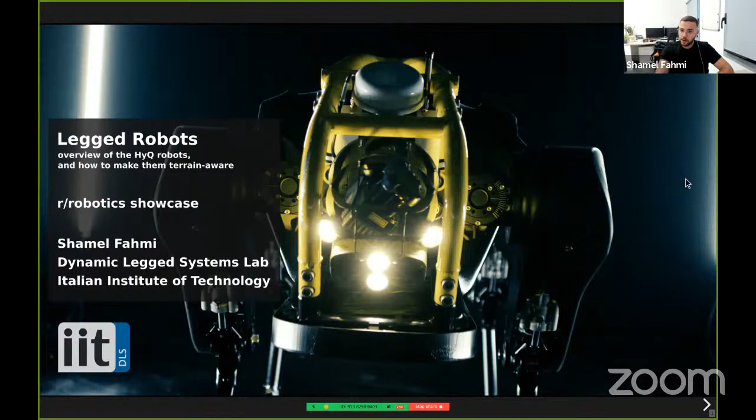Maybe if you can click on this link, it's going to give you the same rendering of the presentation slides that I'm having right now. In case you have some problems with videos, just check it out—it's going to give you a better rendering for the videos.

So yeah, the Dynamic Legged Systems Lab, or DLS Lab for short, is part of IIT, the Italian Institute of Technology, in Genoa, Italy. The Dynamic Legged Systems Lab has been around for 14 years, focusing on legged systems. That mainly started with the PhD of Claudio Semini, who's the head of the lab. We're broadly interested in making robots walk, but that also requires working on robot design, control, locomotion, and perception.

The main focus is also to make robots walk during heavy duty operations. The way we envision this is that we want robots to aid human beings in several applications—construction sites, planetary exploration, warehouses, package delivery, and agriculture, but also search and rescue missions where you don't want to put humans. Think of what happened in Chernobyl or Fukushima, or even in Notre Dame in Paris.

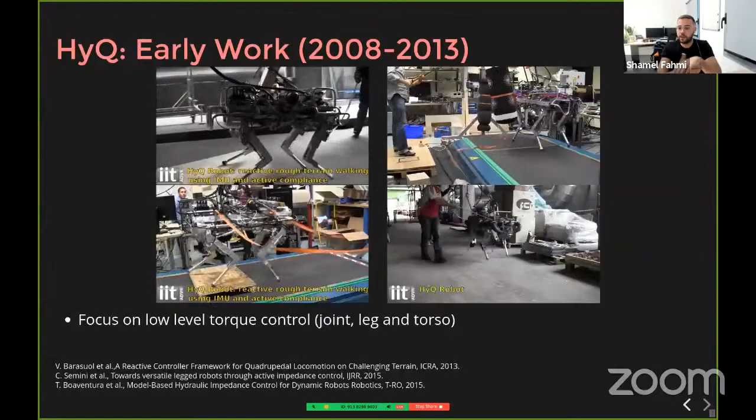So mainly also controlling the joints, legs, and torso. In here, you can see different applications. For example, on the top right, you can see some strategies, or a recovery strategy, on how to let legged robots try to recover from any push.

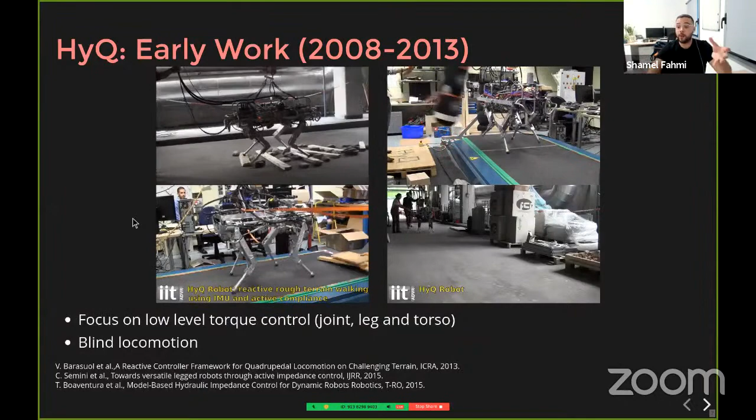But also you can see here pretty cool locomotion capabilities trying to traverse through different rough terrain. What's important to show here is that at this time, all of these locomotion capabilities you're seeing are blind locomotion. So the robot doesn't see what's around it, it has no terrain awareness for it.

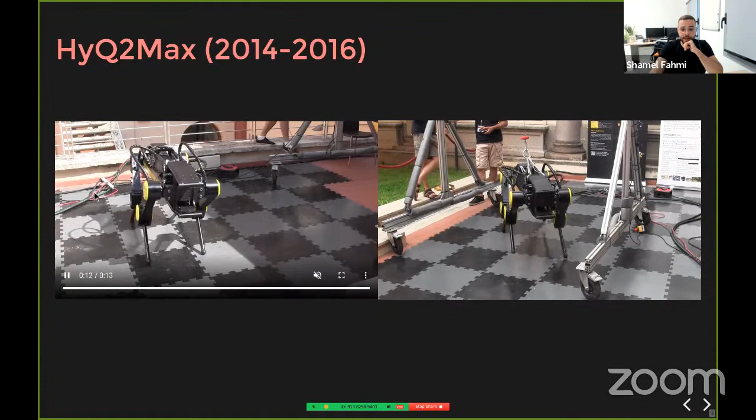After that, we were thinking about what HyQ2Max lacks. The first thing we thought of is power autonomy, because as you can see here, the robot still has the hydraulic pump unit - the pump is outside, not on board of the robot. You can see here also that we're connecting the power supply, which is not on board.

So what we really wanted to focus on was power autonomy, and because of that we decided to have the hydraulic pump unit, or HPU for short, on board along with the power supply. We also wanted to improve the robustness and reliability of the actuators, so we teamed up with Moog, who custom designed these hydraulic actuators for us using 3D titanium printed technology. That was the third generation, our flagship robots.

As I mentioned, we want to focus on robots for heavy duty operations, and because of this we were wondering what might happen if we let these robots pull something as massive as an airplane. So we took HyQReal to the airport of Genoa, and with the help of Piaggio Aerospace, we borrowed their Avanti airplane, which weighs more than 3 tons. We decided to do some experiments to see if the robot is capable of pulling that plane.

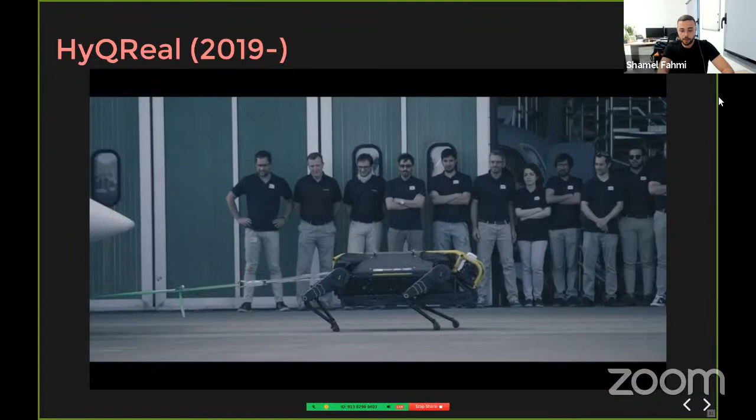This is part of the video that was from 2019. It went viral, showing HyQReal being able to successfully pull that airplane. That day was a great day for me personally, because I've never seen something like that happen, and it was truly inspiring to see a real robot pulling it like that.

But of course, before pulling the plane, we had many experiments. This, for example, is showing you the first steps we had for HyQReal. This was the first time we would try everything and see what the robot would do.

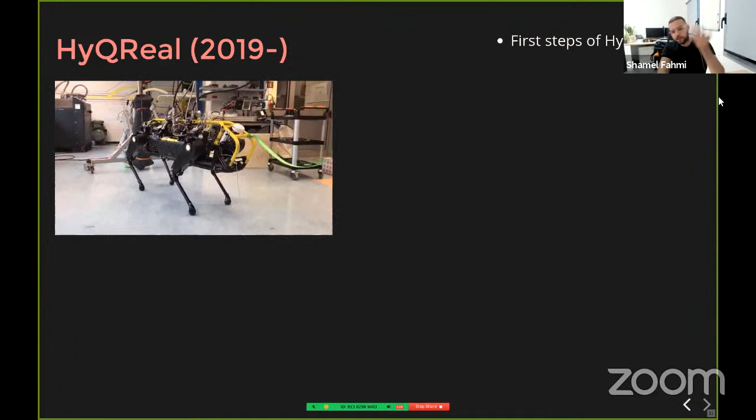Since we were pulling a plane, we decided, okay, let's try to compete first against ourselves. So here you can see Michele Focchi, one of the postdocs, the researchers at the lab, trying to push against HyQ. And when that was successful, we went over with that.

So we wanted to pull a car this time. We took Victor Barasuol, who's also a researcher at the lab. He took his car. I was the one actually inside that car, and I was pulling the handbrake halfway through.

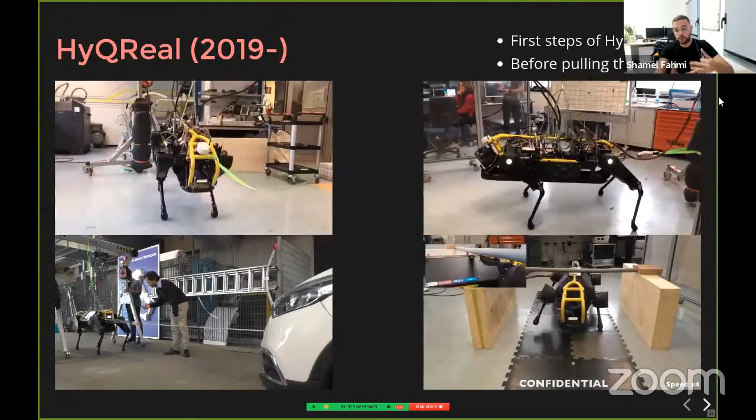Going back to the workspace, now HyQ, HyQReal and HyQ2Max also have a larger workspace that allows us not just to do this kind of stuff and different locomotion, but also allows the robot to traverse confined spaces, which is really important for the applications we're thinking of.

Now this part is one of the projects we're working on recently. The first version, or first part of it, got concluded in 2021. It's about Tele Manipulation with HyQReal.

So we teamed up, a couple of labs of IIT teamed up with INAIL. INAIL is the National Institute for Insurance Against Accidents at Work here in Italy. What they want is to separate humans from hazardous situations. So we were trying to find ways to move workers from these situations into a safe environment and let robots work in these dangerous situations.

And that made us think of teleoperation and teleoperating the robot. So the main purpose of the project was to teleoperate the robot. You would have an exoskeleton, a hand exoskeleton, with a virtual reality interface that we refer to as a pilot station.

And the pilot station is then going to be teleoperating the robot that has an arm on top that can do different kinds of loco-manipulation.

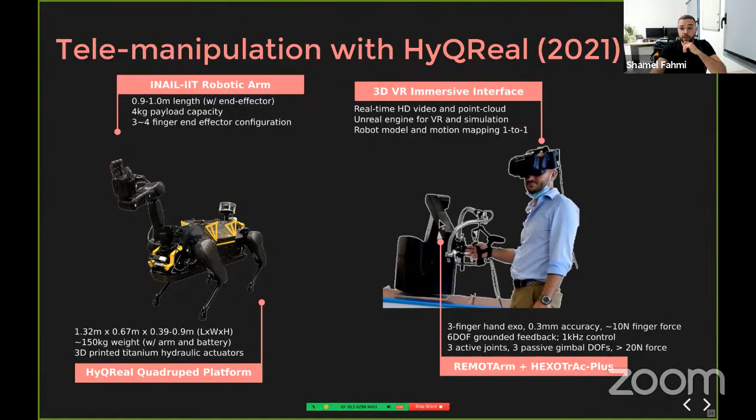This is a quick overview of the Tele Manipulation system we have. On the left here you can see the field robot, which is HyQReal integrated with a custom designed arm for such applications. On the right here you can see the pilot station, which has the hand exoskeletons with an arm and the virtual reality interface.

Let me give you a little information about the arm. As I mentioned, it's custom designed here at IIT to fit the project requirements. It has 5 DOFs and weighs 5 kilograms excluding the end effector. It can also carry up to 4 kilograms.

The control uses torque control or impedance control. Here we optimized the space to do different things, for example configurations for picking up or normal operation, but also to have it in a stow position so it can distribute its weight on the robot.

And the hand we're using here is called the HERI hand, which is a 4-fingered hand that has integrated pressure sensing and visual feedback.

This is just a video to show you what the hand can do, what the exoskeleton can do. Here you can see it doing some manipulation, picking up objects transparently. So you have the hand being like the robot, a KUKA robot, picking things up in a teleoperative way.

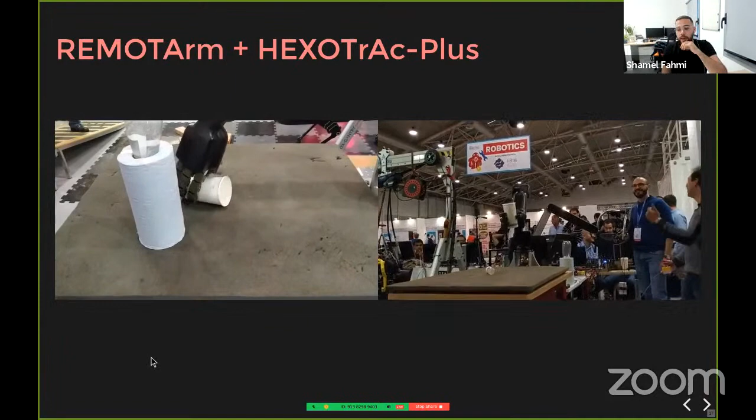And here we have the arm with the hand and the teleoperative exoskeleton. This was at Maker Faire, before COVID, I can't remember exactly when this was. But here you can see, for example, how to pick up a tennis ball on top of a bottle. And here we were showing Enrico Mingo trying to catch that ball.

And this is the integration of everything. So what we want to show here is the robot being teleoperated. For example, here we wanted to break the window and take the hose.

So here you can see, for example, what the pilot is actually seeing. It's only seeing these 2 cameras from the VR.

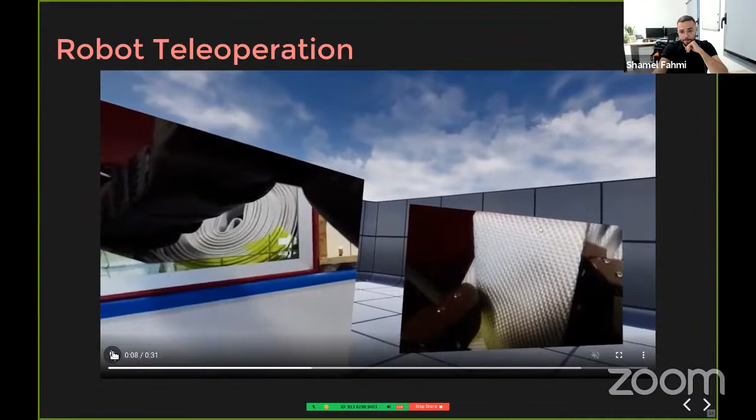Here we're showing another example when we wanted the robot to just open a door. And again, in the bottom videos, this is what you can only see within the pilot station.

Here we're showing some other things, for example showing the robot picking up some objects and putting it back for inspection.

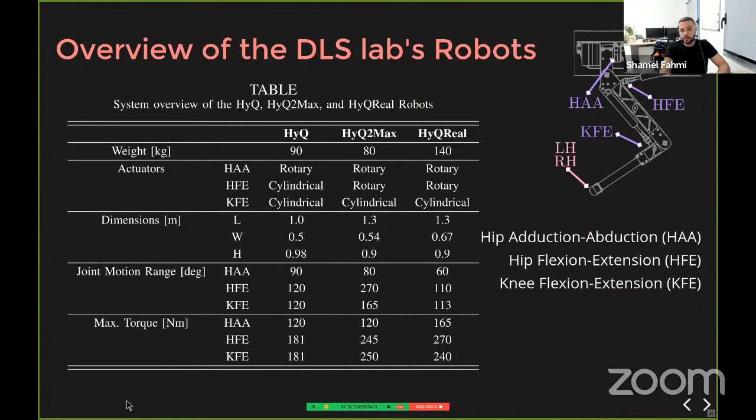So that concludes a brief overview of the HyQ robots, or the robots that we have here. I'm not going to go through this table, but it's cool for you to go back and check it out later in the offline version to see the comparison of the different platforms.

Here they're without the arms, so they're the actual robots. This takes us to the second part of today's talk, which is about terrain awareness. This is the same video I showed you in the beginning when talking about HyQ in 2013. This video also went viral alongside other quadruped robots, like Big Dog from Boston Dynamics, which was also doing some pretty cool locomotion at that time.

As I mentioned, this was blind locomotion, but ever since then the goal was to move legged robots away from research labs into the real world. So if we go back to these applications and think about bringing legged robots to the real world, we should wonder if there's anything in common across all of them.

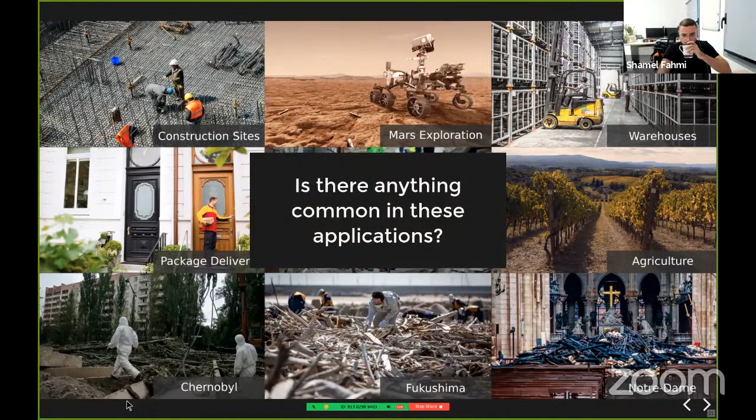To me, the first obvious thing in common is that the terrains the robot traverses are never the same. The terrain could be dynamic, meaning it can move and isn't stationary—it constantly changes. It's also unexplored, like if the robot hasn't traversed this place before or you don't have any prior map. But the terrain itself could also be uncertain.

What I mean is that the robot can be in situations where it doesn't get certain information from the terrain, like scenarios where vision is denied or the robot's perception is noisy. The take-home message is that the terrain itself introduces a large amount of uncertainty, and the way to deal with this is to make legged robots terrain aware. So the solution is for legged robots to be terrain aware.

If you're not familiar with the term, terrain aware locomotion means the robot is able to make decisions based on the surrounding terrain using its perception. Abstractly speaking, the main idea is that you want the robot to perceive its surroundings, and then using that perception, start to reason about and understand the information, and take decisions based on that.

I want to categorize terrain aware locomotion into two categories. The first is called proprioceptive terrain aware locomotion, or PTAL for short, and the second is exteroceptive TAL, or ETAL. PTAL strategies rely on internal robot measurements to acquire terrain information, while ETAL strategies rely on directly acquiring terrain information, mainly using the robot's vision.

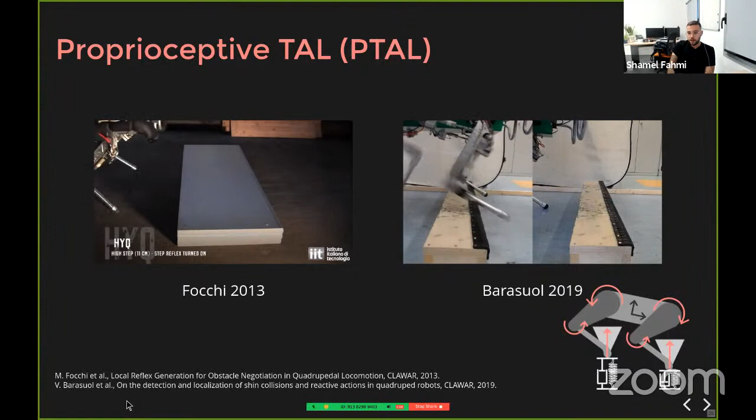On the right here, you can see work done in 2019 by Barasuol et al., which does something similar—detecting whether there's an obstacle or not. But beyond that, the key here is also to localize where on the leg the robot collided with an obstacle, so that later it can adapt its trajectory based on that.

Now that we've talked about PTAL strategies and ETAL strategies, when would you use each one? PTAL strategies are important when visual feedback is denied, like in areas that are smoky or have thick vegetation, for example.

But also if the terrain map itself is unreliable, you might want to use PTAL strategies. However, PTAL strategies, based on their nature, are limited to corrective actions. What I mean is that if you took a look at the reflex strategies I was talking about, the robot first had to collide to detect that it's in contact.

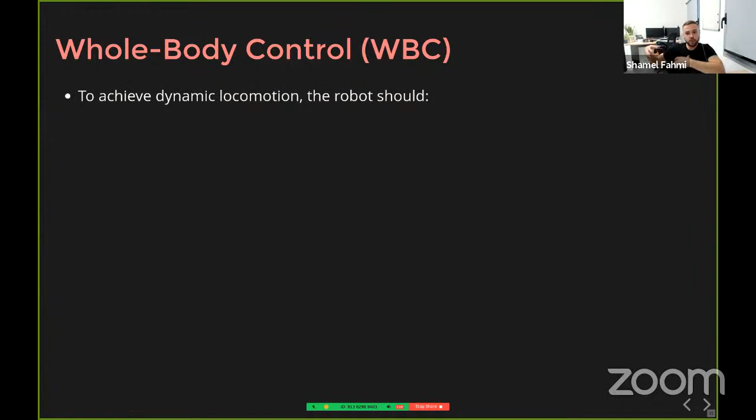So about whole body control. Now, if you want to achieve dynamic locomotion, or if you want to have breakthroughs in legged robots, the robot should be able to track the trajectories that you give it. That's obvious, but it should also try to maintain balance, so as not to fall down. It should also be able to reason about its own dynamics and its own limitations.

But also, if you want it to be terrain aware, the robot should not just reason about itself, but it should reason about the contact or about the terrain, for example the terrain's inclination or physical properties. So if you want to deal with all these objectives in an optimal way, the solution is to devise a whole body control framework.

So let me tell you a bit about the whole body control framework that we're using here at the lab. The whole body control framework starts with the locomotion planner, and the idea of the locomotion planner is that it spits out trajectories for the legs and for the base.

Then we have a state estimator module that feeds back the states or estimates of the robot. And then, using the planner and the state estimator, the whole body control is going to realize the trajectories from the planner, taking into account the limitations that I just explained. Then it's going to spit out optimal torques that are sent at the low level to the low level controller that sends the torques to the robot.

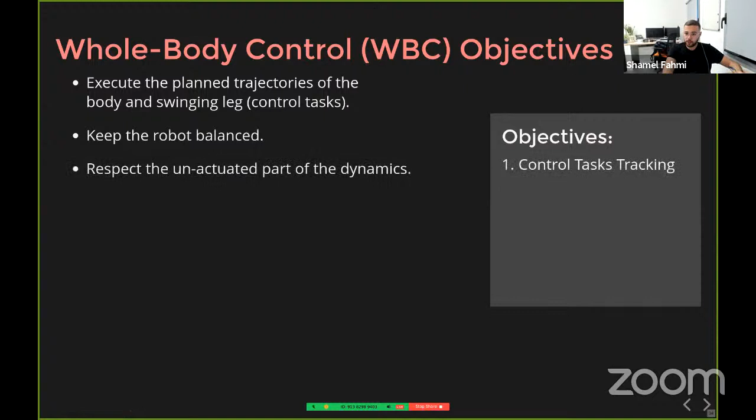Let me briefly tell you about the objectives of the whole body controller. As I just mentioned, we want to execute the planned trajectories from the planner, but also we want to keep the robot balanced. We also want to respect the unactuated part of the dynamics, as well as the actuated part and the joint limits. We want to respect the contact constraints that I mentioned, so we want to be aware of the terrain.

The first thing we want to do is enforce or encode friction constraints, which basically enforces the robot not to slip. We also want, for example, since you're walking on the ground, the ground is never going to pull towards it — it can only push, not pull.

And then we also want to maintain contact consistency. What I mean by maintaining contact consistency is that, for example, if you are on rigid terrain and the robot is standing still, you want to enforce that the stance legs don't move, that they stay stationary. We refer to that as the stance task.

Now that we have all of these objectives, we're going to cast them as an optimization problem and solve it via quadratic programming. Then we're going to map the solution from the QP to optimal joint torques using inverse dynamics.

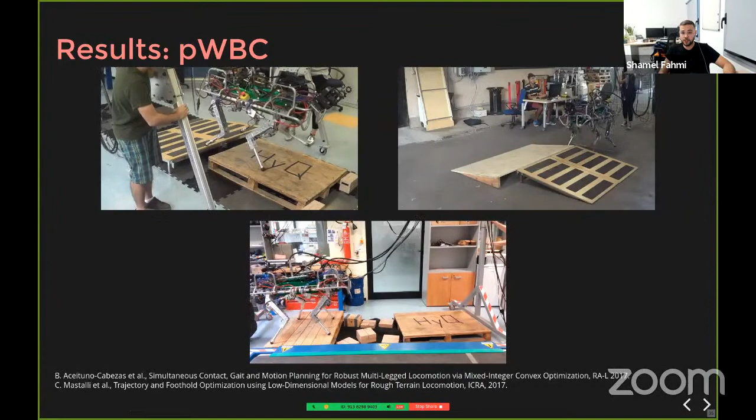So these are just a couple of results to show you what the whole body controller can do. Here you can see that it's capable of tracking the motion and adapting to different rough terrain conditions, such as different terrain inclinations, but also under different gaits. You can also see at the bottom that the robot can maintain balance even if it stands on a foothold that is unstable, like here, when the rock was moving away.

So just to recap, the whole body controller that I mentioned is aware of the terrain's geometry and friction. It can also achieve dynamic locomotion while at the same time compliantly balancing the robot's trunk. And we showed how it works under different gaits and different terrain conditions.

Now the question would be, can you still say that whole body controller is terrain aware? And the answer is not really, because of soft terrain, for example. If you take a look at that whole body controller, but also other locomotion control strategies in general, they most of the time assume rigid contacts, which is good—it's not bad actually, because it keeps our equations and formulation a bit simpler, so it's easy to use.

But at the same time, if you take a look at the world around us, nothing is always rigid. Things are not just rigid—they're also stiff, they're soft at the same time. So this is actually a problem, that most whole body controllers are not terrain aware, meaning that they fail to generalize beyond rigid terrain.

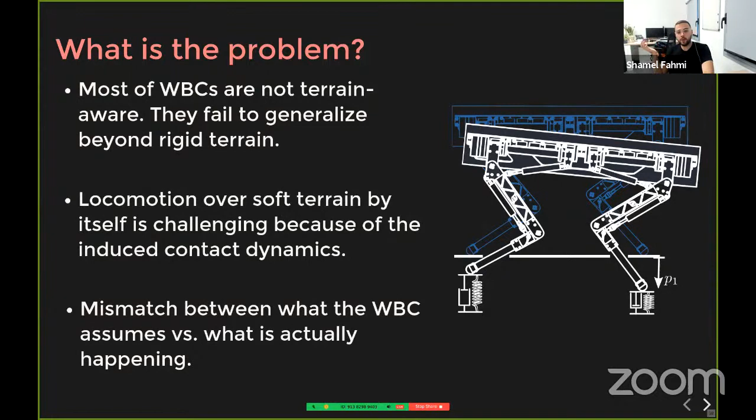So how do you think we can solve this? The first thing we can do is drop the assumption of rigid terrain, and use a more general model that can take into account not just rigid or stiff terrain, but also different terrain impedance. But then that's not enough, because how do you know the impedance parameter of the terrain? You're going to be walking through so many terrains—how are you going to know that? And the answer is to simply just estimate it.

So this is how to do that. We have the standard whole body controller that I explained, and we're going to reformulate it to be compliant contact consistent—meaning consistent with different compliances of the terrain. But for that whole body controller to be compliant contact consistent, it needs the terrain impedance parameters. So we have a terrain compliance estimator module that estimates the terrain's impedance based on the robot's current measurements, and we do that at every control loop.

So the terrain compliance estimator is going to estimate what terrain impedance the robot is traversing, and send it to the whole body controller that can take that into account, send it back to the robot, and so on and so forth. We refer to that approach as STANCE, which stands for Soft Terrain Adaptation and Compliance Estimation. Let me show you what STANCE can do.

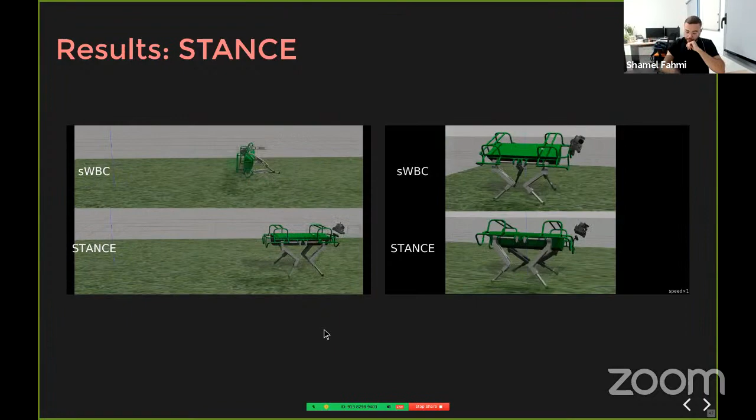STANCE understands what kind of terrain it's walking over, and because of that, it tries to come up with optimal ground reaction forces, for example, or optimal trajectories for the robot to take. Here you can see the difference in some cases, in simulation and in experiment.

Here I'm just showing you two different experiments. On the left, we're showing that STANCE also works not just for slower gaits, but also with more dynamic gaits, such as the trot gait, for example.

On the right, we see the capabilities of the terrain compliance estimator to estimate different terrain impedance parameters. We used four different terrains, and showed that the terrain compliance estimator of STANCE can indeed independently sense the compliance under each leg.

So just to recap, with STANCE, unlike the standard whole body controller, we do not assume that the ground is rigid anymore. Because of this, we're able to adapt to any terrain compliance online, and HyQ was able to traverse and transition between multiple terrains with different compliances without any re-tuning.

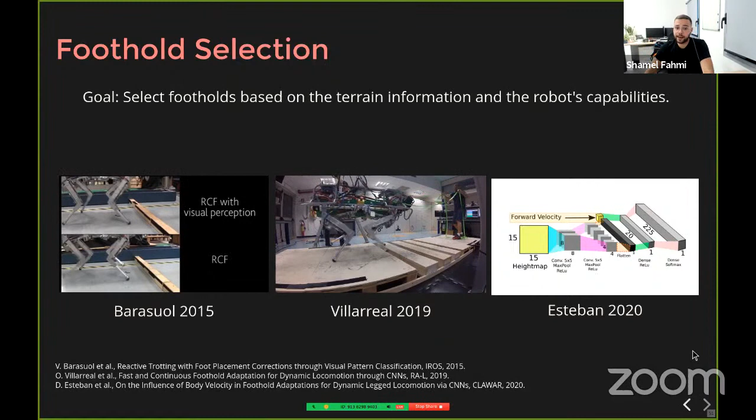It started in 2015, where the idea is that we wanted to teach the robot what would be the best foothold that it can take. Because of this, we relied on expert demonstrations. So the expert or the user was the one teaching the robot, or labeling the data to the robot, what is the best foothold and what is not, based on the inputs that it gets.

And in 2019, Villarreal et al. improved on that, improving the kind of criteria or capabilities that the robot has. But also now, to teach the robot, we did not rely on labeling the data that we had, but we were using self-supervised learning, and we trained it via neural networks, or convolutional neural networks in that case.

And then in 2020, Esteban et al. improved on the versions of 2015 and 2019, and also improved the structure and architecture of the CNNs that we were using. We refer to this work as the vision-based foothold adaptation, or VFA for short.

Now that we have talked about foothold selection, there is one issue though, or one problem that one can see: despite the work on foothold selection, pose adaptation strategies lag behind. So why is that a problem?

If you think of it, if you want to select what would be the optimal foothold, basically the leg just can't move on its own. You have to also move the pose of the robot. So if you want to do foothold planning in general, foothold selection and pose adaptation, both of them are important, because you cannot remove them from each other. They move simultaneously with each other. For the leg to move, also the pose has to move. And this is the importance of pose optimization.

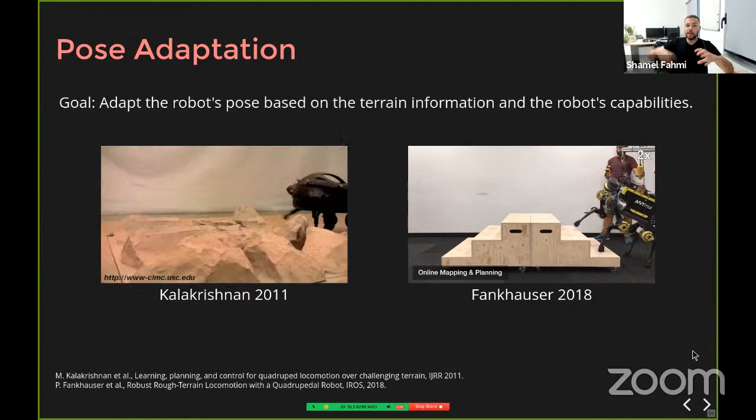So these are a couple of related works on pose optimization. The goal of the pose optimizer is to adapt the robot's pose, similar to the foothold selection. The foothold selection was interested in finding the best foothold based on the terrain information and the capabilities, or what the robot can do. With pose adaptation it's the same, but for the pose now. So we want to adapt the robot pose using the terrain information and what the robot can do.

But there's a problem with the current pose adaptation techniques. These strategies focus on finding an optimal solution based on given, selected footholds. What I mean is that the pose adaptation relies on footholds being selected first. Once you select these footholds, you optimize the pose on top of that. So first you select, and then you optimize.

But there's an issue here, because what would happen if the robot did not reach this foothold? For example, if the robot gets disturbed, what would happen to the pose of the robot? The answer is that the robot might end in a position or pose with no safe footholds around it.

In order to solve this, we propose a different paradigm. Instead of finding footholds or optimizing the pose based on given footholds, we want to optimize or find the body pose that maximizes the chances of the robot reaching safe footholds in the first place. So we're not just optimizing with respect to given footholds, but in general around the robot. We want to put the robot in a state that if it gets disturbed, it's going to remain around a set of solutions that are still safe and reachable.

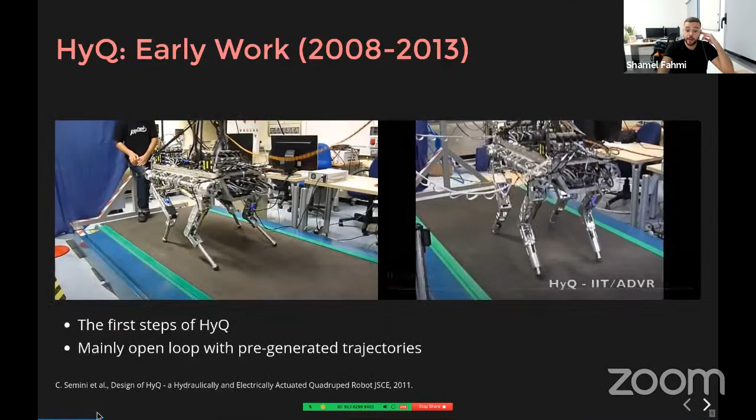Now I want to thank everyone - the work I mentioned about terrain-aware locomotion is not only my work. I would like to thank all of my co-authors for their great help throughout my stay at IIT. I've just talked about one part of our research in the lab, but there's other kinds of research we do too, including MPC, feasible regions, state estimation, and also some really cool research on how to make quadrupeds walk or balance using only 2 legs.

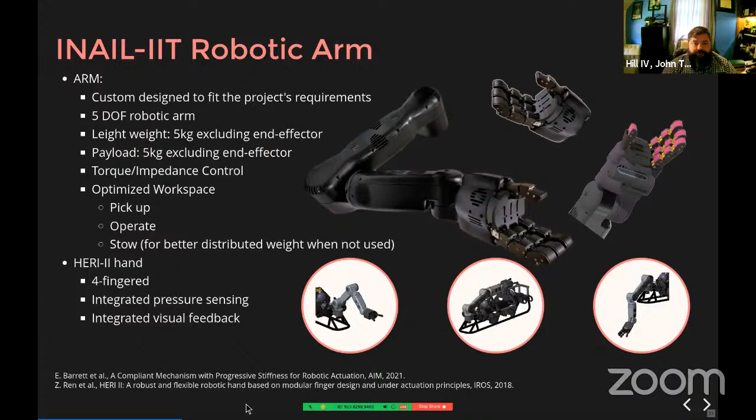So the next one, and this is actually one I'm a little interested in too: since you're using ML approaches, how are you accounting for robustness and generalization? Earlier you mentioned that when on terrain, legged locomotion is really good, but it's often dynamic and unpredictable, so what we learn now is probably not going to be useful later. How do you account for that?

For example, the way we learn our neural networks - for the VFA, the inputs are height maps and other robot inputs. We sample these height maps. If this height map is just a matrix, you can literally sample all of the possible combinations of the matrix, so you can get generalization from playing or tweaking with the data.

That's one thing. Another thing is that we also try to inject some noise into the data so that we can make the neural nets more reliable.

One important thing is that we don't just focus on the implementation using neural nets, but we also try to be smart when we devise the locomotion strategies. For example, we know the neural network is not going to be super perfect, it's not going to be 100% accurate. We also know the states of the robot are not going to be accurate.

In the foothold evaluation itself, we have different modules that account for uncertainty. A simple example: if you choose a foothold, you want to make sure whatever is around it is also safe based on the evaluation you get. So if there's a little drift in the state estimation or a problem in the accuracy of the neural network, you can take that into account already. Did that answer your question?

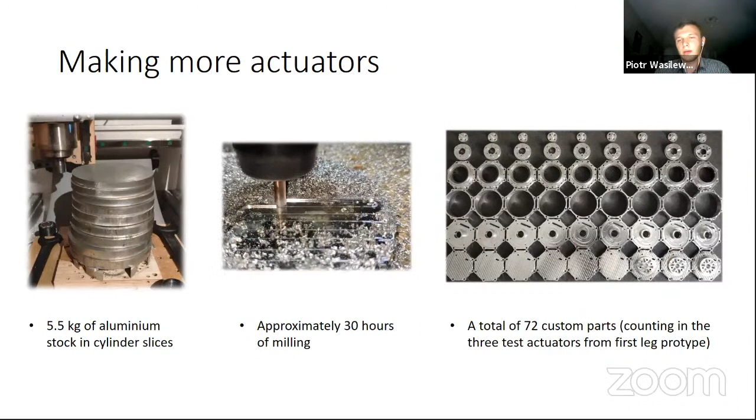After checking the performance of these 3 actuators, I proceeded with making 9 more of them. On the left-hand side, you can see the amount of aluminum stock that went into making these parts - over 5 kilograms of aluminum slices that I face milled on both sides. Each individual part was then milled from these prepared stock parts. It took me around 30 hours of milling to get a total of 72 custom parts, so 6 per actuator.

Now a little bit about the torso itself. There are a few PCBs inside. There's a power board that distributes the power supply from the battery to the actuators, and it also has a small pre-charge unit that slowly ramps up the voltage.

This is so we don't get a high current spike when instantaneously turning on the voltage for the actuators, because each actuator is equipped with high capacitance on the DC bus. It could damage the connectors or the switch if turned on instantaneously.

There are also 2 power and FDCAN distribution boards. As the name suggests, these are just connector boards connected in parallel to distribute the communication and power supply buses to the actuators located in the 2 parts of the torso.

There's also the control board, equipped with 2 microcontrollers. One is responsible for translating the SPI commands from the Raspberry Pi to the actuators, acting like a converter between the SPI bus and FDCAN bus. The other one handles the IMU and wireless communication, as well as some diagnostics of the voltage and current consumption of the whole robot - basically a few measurements from the battery itself.

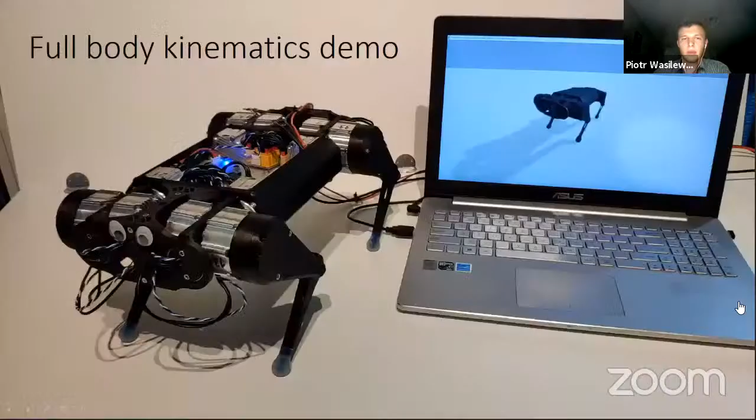And here's a recorded demo of the full body kinematics.

This is a comparison between the simulation conducted in PyBullet and a real robot that is controlled from the same Python script. It performs translations in all 3 axes and rotations as well.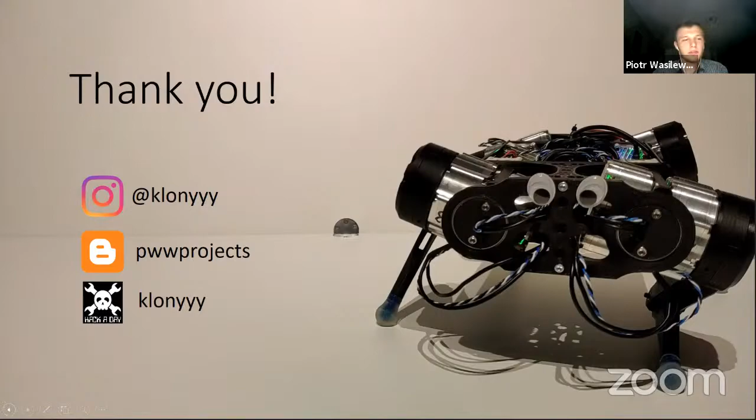I think the shortage is affecting us all, so I don't have a way to deal with it other than asking my friends who do electronics to help source a few parts for me too. But I chose the STM32G4 because it is optimized for motor control tasks.

It has a CORDIC unit for trigonometric calculations, and some features that allow it to run the algorithm faster. It's quite common in modern controllers, so that was an obvious choice.

As for the challenges, there were quite a few, because the controllers in my case have some history. I tried to make a controller for 3.5 years, and I failed at first, but now it works. It has a bootloader, so I have an easy way of upgrading the software when these actuators are actually mounted to the robot itself.

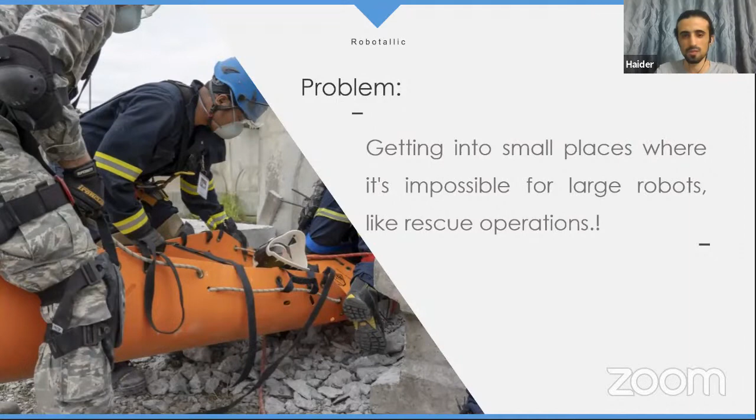A bimetallic strip is simply two metals which have different coefficients of expansion when heated. They're simply attached to each other, and when you heat them, one will stretch more than the other and it will bend, as you can see here. This is a small demo from the Physics Demos channel.

I'm heating on both sides to convince you that I'm not cheating by just heating one side and having it expand. So that is a bimetallic strip.

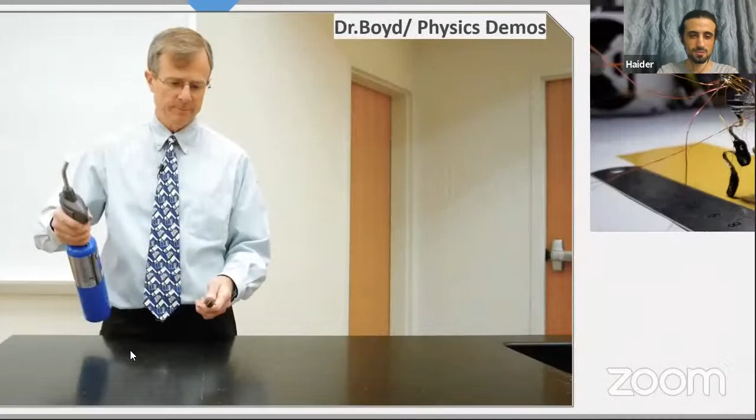So, simple — we have such materials, but now we have small robots. In small robots, it all started in 2016. I was seeing all these amazing robots made by people, and at the same time I was fascinated by small insects — how small they are and how they walk, the motors they have to locomote from one place to another. The question was, do I have to build a very small motor to make a very small robot? The answer was no, obviously.

So I started to look into smart materials. This isn't actually the first project I've done trying to move something really small, but this particular Robotallic started with a 50-cent coin attached to a muscle, which I call it now, and the concept worked great. So I moved on to simply make a two-legged robot to test the concept, also in 2016. Things worked okay. In 2019 I moved to prove the concept further by building a four-legged robot, using only 4 muscles to prove the concept, and it worked great.

The fourth one, Robotallic, made in 2021, this year, was made especially for this event. I started to make a prototype with a very different type of muscle — it's the same thing, but a different shape, because a different shape gives you a different response.

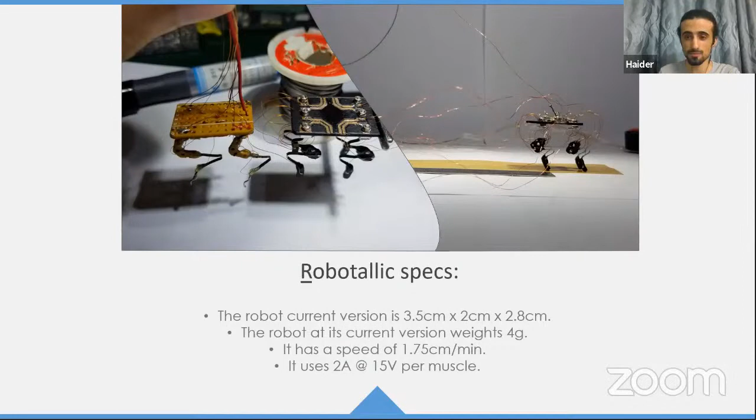I'll jump right here now to the demo. In this demo, I will let my old self who made this video speak here a little bit and show you just how it works.

Walking: basically, there's a couple of ways to move the robot, either by using the upper muscles only or using the lower muscles only. The best that I have found so far is to make them all work together in a sequence, as we can see here.

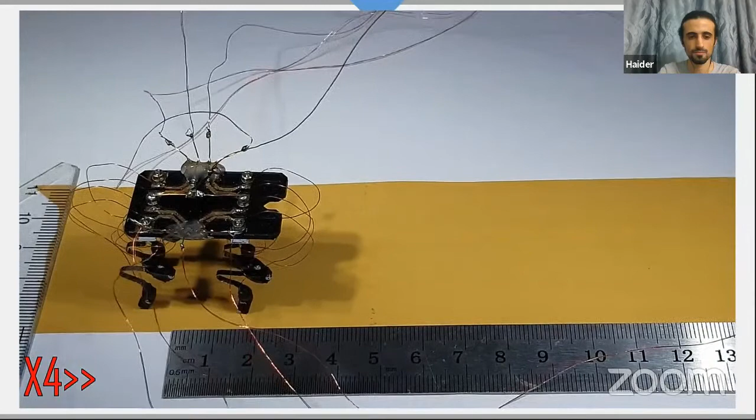However, there are 2 types. There are the short stretches, which will make the robot walk on a smooth surface. It will make it walk faster, and it will be like hopping, like this, as you see here, for example.

The robot is normally controlled by the best prototyping tool in history, Arduino, and an 8-relay module. There are also 2 power supplies, one for the relay module and the other for the robot. For best functionality, the robot uses 2 amps of current at 15 volts as a minimum supply. Higher current was used when more than 1 muscle is activated, but it's kept at around 4 amps.

So yeah, this was basically how it walks. Of course, this version has, as you heard before, short stretches, and this is the longer stretches. What it means is when you heat it more, the material will flex more, and thus you have a longer stretch, but it will be slower as well, as we can see here.

It obviously can go backwards as well, just by reversing the algorithm, or we can make it go forward. This is simply just the Robotallic current version.

Yeah, so I'm still at a point - I'm actually now answering a question. So where is the good starting point for this? Because as you said, you've seen it uses 4 amps at 15 volts, which is really high, and I'm hoping in the future to find a good shape for the muscles itself, so that it can be low power and at the same time perform better.

You mean, for example, here the upper muscle, the W shape? Yes. They're not connected, it's not one limb. That's why you have a knee joint here between the two different muscles, so that you can control them individually. The shape, I'm still trying different shapes. The reason the upper muscle is wiggly like this is to make it longer, because with a longer material you can stretch more, and thus have a very long stretch for the leg. So yeah, that's how it is.

Okay, next question: how do the legs hold up with repeated heating and cooling cycles? Do you have any problems with wearing out or fractures associated with that material? Actually, there's none of these problems, but other problems you'll notice when the robot walks for a long period of time: the muscles start to really compress, become smaller and smaller, and the stretches become smaller too. I've thought of this problem before, and the solution I'm trying to find now is how to make them flex faster so they can cool faster, and how to make a cooling system for each muscle. This is something I have to develop for the next prototype I'm going to build, to tackle this problem.

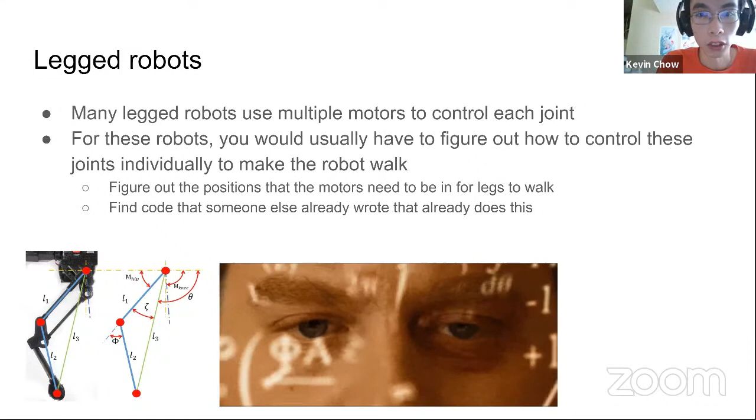As for legged robots in general, for many legged robots you'd need multiple motors to control each joint. You might have one motor for the lower leg, one for the upper leg, and so on for each leg. For these robots, you usually have to figure out how to control each motor individually to get them into position in order to walk. So that would either involve lots of math or stuff like that, or finding code that someone else already wrote that does this.

As for what I worked with, it's the Hexbug Spider XL, which is a kid's remote controlled toy. Despite being called a spider, it only has 6 legs. The way it works is you have forward, backward movement, and turning of its head that controls which direction it moves in or faces. In total there's actually only 2 motors, one for forward/backward motion and one for turning the head to change direction.

That essentially reduces having to deal with many motors and figuring out how those motors need to move in order to walk, down to having to deal with only 2 motors. My goal with this is I just want to see how advanced I can make a simple toy by adding a bunch of stuff onto it.

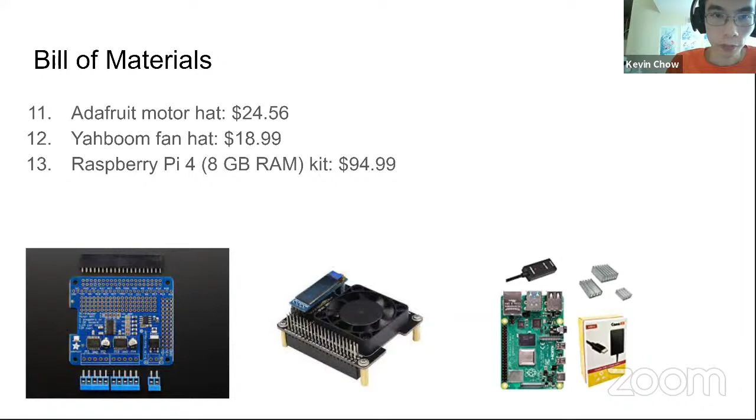I also 3D printed some stuff; this was essentially the 3D printer I used. I also have extra things: one HDMI plug, mainly for debugging purposes so I can remote into my Raspberry Pi easier, and a Pi Juice hat, which provides power to the Raspberry Pi, plus a set of batteries for powering the motor controller itself.

All this comes to around a bit over $1,000. Some of the cost might be lower if I had made better choices, like not buying bulk of some stuff. As for software, I put Ubuntu Mate 20.04 64-bit on my Raspberry Pi, and on that has ROS Noetic and Python for some of the code I've written for controlling motors.

As for my first iteration that I posted on Reddit, it basically looks something like this. This was before I got an upgraded battery for the Pi Juice that's powering the Raspberry Pi. The reason I have this power bank here in this first iteration is because apparently the cameras draw a lot of power.

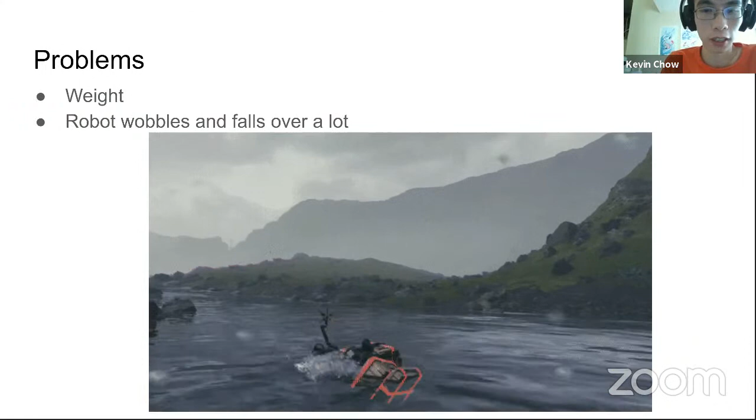Basically there were some problems I initially faced, and I guess somewhat currently face as well. Sometimes there's a lot of stuff stacked onto the robot, so there's some issues with the weight, and the robot wobbling and falling over a lot.

If you guys ever played the game Death Stranding, you know how you might end up having a bunch of stuff on your back and you're constantly tripping and falling - that's kind of what I experienced a lot of times, especially with the whole camera setup and extra batteries and stuff. Another issue is that the robot inherently doesn't walk straight. That's something I haven't got around to dealing with, but I just left it for now.

And then the third problem is that the Raspberry Pi, while simple to use, isn't exactly powerful enough for handling a lot of the software that the RealSense cameras will use.

So a bit about the RealSense cameras: the reason I have two is that initially I wanted one camera to deal with depth sensing, and the second camera is mainly for providing odometry and tracking, like how fast the robot will essentially go. So yeah, I guess now I can get to a live demo of the robot.

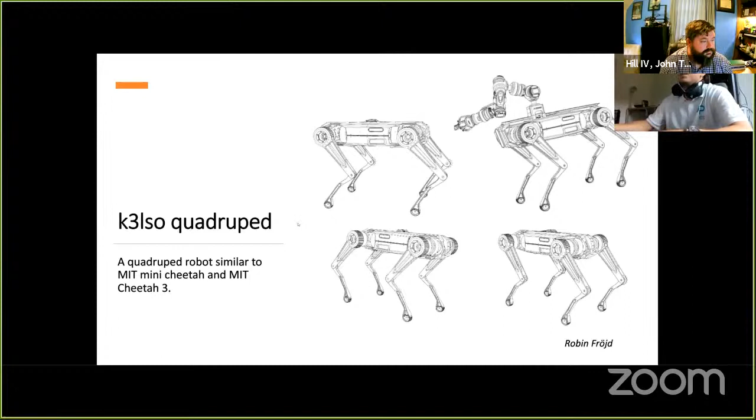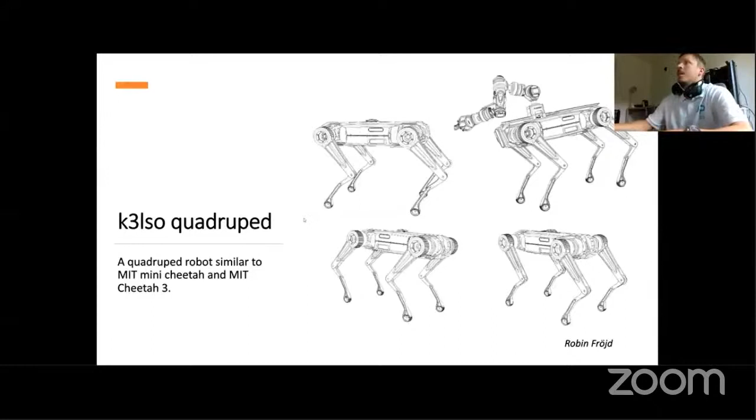Present my work here today. So my name is Robin, working on a quadruped robot for some months now, named Kelso. It's very similar to the mini Cheetah or the Cheetah 3. I started this project purely on a hobby level because of the fun of it, I'm doing it on my spare time. Yeah, that's about it. And here's the body. It's roughly 600 millimeters long, and the estimated walking height will be roughly 35 to 40 centimeters high.

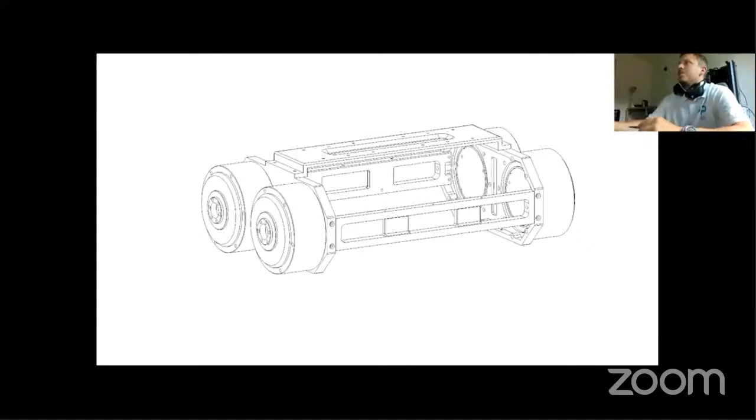Before ordering stuff and finalizing the design, I compared the different specs from a few selected robots out there. I checked the mini Cheetah, the Cheetah 3, and the Laikago Pro, compared them, and came up with my specs and my design.

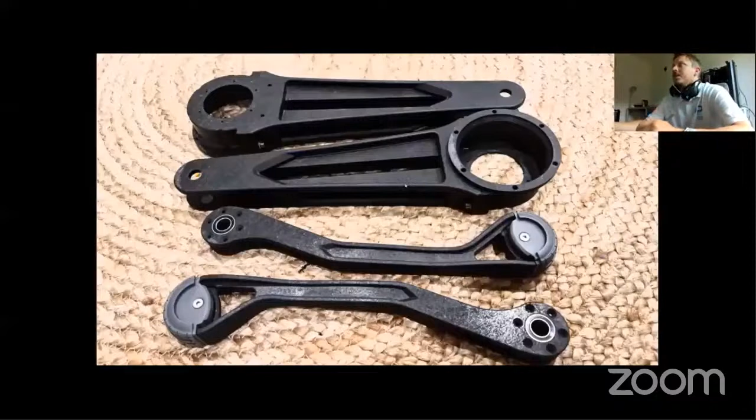So here's two sets of legs. The first one was the aluminium 7075, and I also made a set of milled carbon fiber legs. Here is a close-up picture of the carbon fiber legs, you can see the fiber structure here. Leg weights: the aluminium legs, all legs on the robot is roughly 3 kilos, and the carbon fiber legs is roughly 2 kilos. Each part made out of carbon fiber is reducing the weight roughly 30% for each part, making me save around 1 kilo in total weight compared to aluminium.

Here's just a picture of the robot on the stand. We did some testing for the motion on the motors, with the connection, the cables, the frequency. We have them running here and not on the robot. Here are some impact bars we made for protecting the robot in case it falls down, they should take the first punch, maybe save some parts.

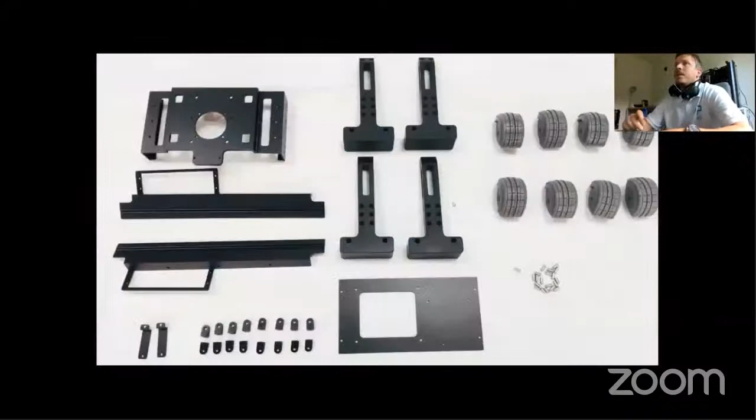Here are other few parts. So here we have the feet, we have 3 different sets, 35, 40, and 45 A-shore. At the moment we are testing with 35 A-shore, and we will see in the end what we end up with. In the middle here you have the resting cushions molded out of rubber, it's for the robot resting position. Here is a mount for the cameras, the battery pack, and the fan inlet.

On the bottom side, a plate for the SSD is mounted, and also a spot for RTK GPS for centimeter precision outdoors. These two are for mounting the covers on the robot. Here is a sheet metal part, made out of aluminium. In the middle here we have the battery compartment, and on the upside we have the Up Xtreme and the place for a Jetson NX as well.

Let's see what's happening now.

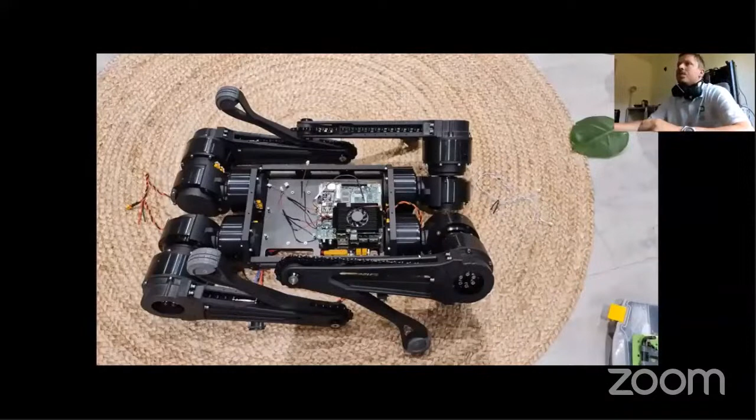Here is a folded picture of the robot. This is how small it can get if you fold it together, in case of travel or something like that. Here is a custom milled chain tensioner.

We went with a chain as a drivetrain since we wanted to reduce any chance of slippage. We wanted splittable linkage, and also the ability to change the gear ratio on the knee quite easily, and the chain allows us to do that. A downside might be backlash, but I haven't noticed any major backlash when doing testing. I think we had roughly 1.2 millimeters at the end, and that's also including the backlash from the motors.

Here is the robot in a walking stand. We will use this stand for testing the first walks and other motions. Here is another stand, used at my office for testing various stuff and also to have a place for it.

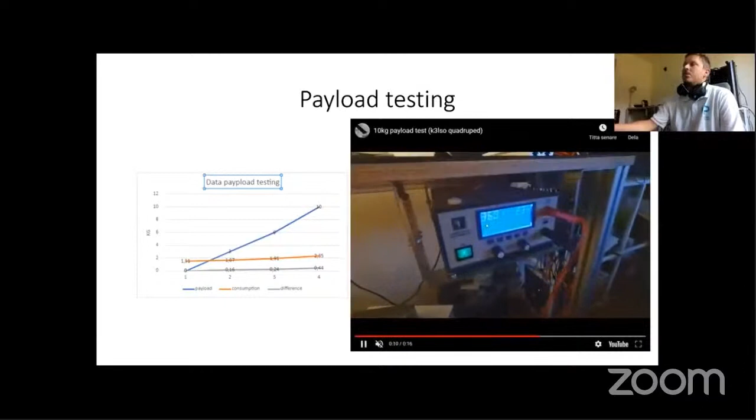Here is a video of the first payload testing. In this video we are using 10 kilos on top. The total power consumption is then roughly 2.35 amps. We also did some testing with 3 kilos and 6 kilos, and you have the power consumption here. We will do more testing with that in the future.

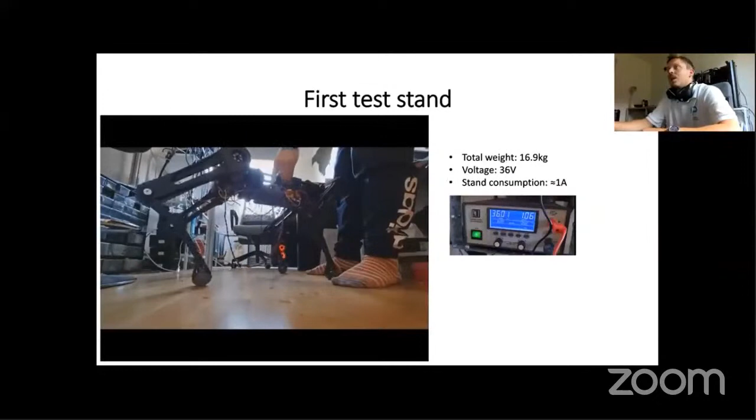Here is a video of the first test stand of K3lso. Total weight is 17 kilos. The voltage running is 36 volts, and the stand consumption is 1 amp. So quite good numbers for the first test stand. We will do more testing with power consumption in the future.

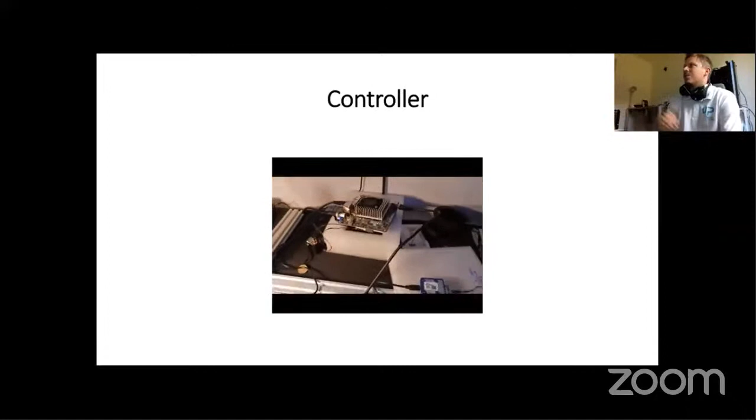For the controller, we started out testing a Nintendo Switch for controlling the robot. The Nintendo Switch is running Ubuntu, and we are running ROS on it. In this video, we are streaming 2 RealSense cameras, also running the CHAMP ROS package, and the Joy-Con is working, etc. For future work, we'll also look for other alternatives. I think this year we will have a bunch of different handheld gaming controllers with joysticks and better performance than the Switch, but also at a higher price point.

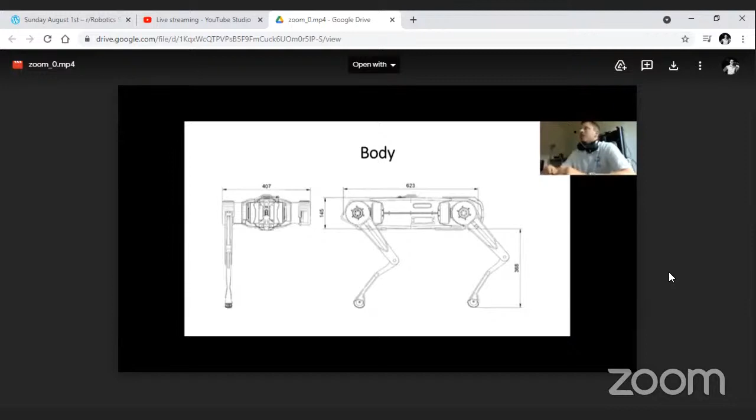Okay, so the next question is, what techniques are you exploring for locomotion? So at the moment we are converted to ROS2. We will use Robot Gym, it's called, from Nick Russo. We will try that out in the coming weeks. And Robot Gym is basically based on the Google Agile imitation MPC controller. So but that's for future work. I haven't tried that yet, but that's the plan.

Okay, so next question is what was wrong with the RMD controllers? From the T-motor motors, what was not wrong? Basically I don't actually remember. I ended up just removing them because I was so tired of going back and forth, the motors were not running correctly. So it was something wrong with them that I couldn't fix. I didn't spend any time investigating what was wrong with them.

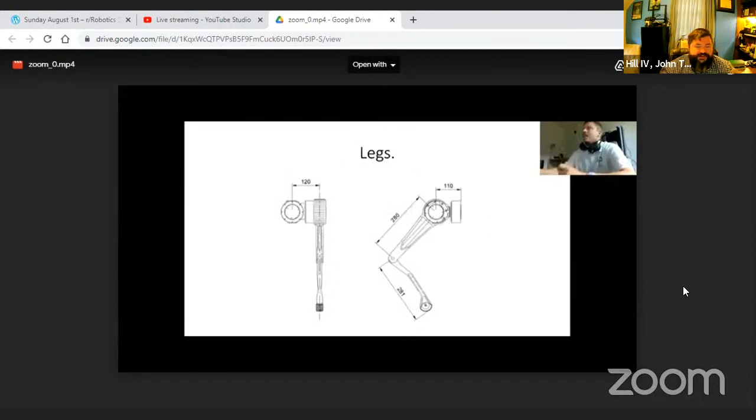Okay, so a question I actually have for you is, drawing from Boston Dynamics for inspiration, even just as you've described different limbs, different body structures were inspired by different products they've had. Have you looked at others as well? We've talked all day about a bunch of different folks developing their own quadrupeds. Have you been exploring adding other inspiration for different designs?

Yeah, I looked at Deep Robotics a bit, their quadruped robots. Ended up not using anything from them, but the form factor is also quite similar to theirs, I don't remember the name. But yeah, I have looked around quite a lot on different robots, only for inspiration. Everything I draw myself.

So yeah, okay, next question is did you focus on that shown arm on top, or I'm assuming what they mean is are you considering adding an arm to it, like the cheetah bots? Yeah, I'm in that Kickstarter, so I will get that arm in October. So we will see what I will do with it, but maybe have it on the robot, maybe I do some other fun stuff. But yeah, I'm in that Kickstarter.

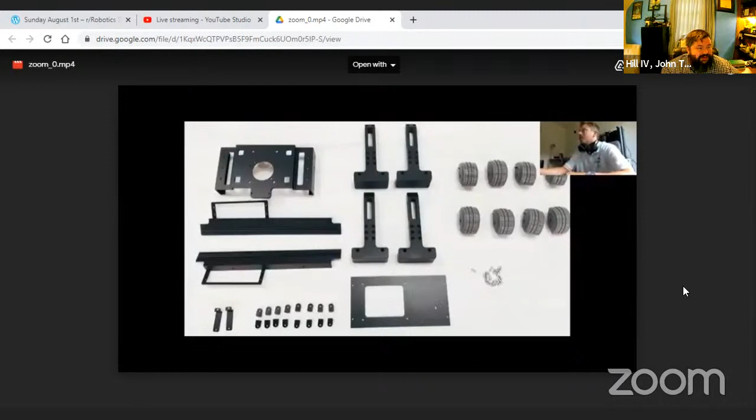A few folks are asking if K3lso is going to be open sourced as well. I know you've put a few posts on Hackaday, but wasn't sure if you were doing open source architecture, open source design with that. I think so, maybe in the end, but maybe I don't see any point because there are quite a few ready robots to buy, and this will be more expensive than buying a ready one. So I'm not sure, maybe in the end I will do it.

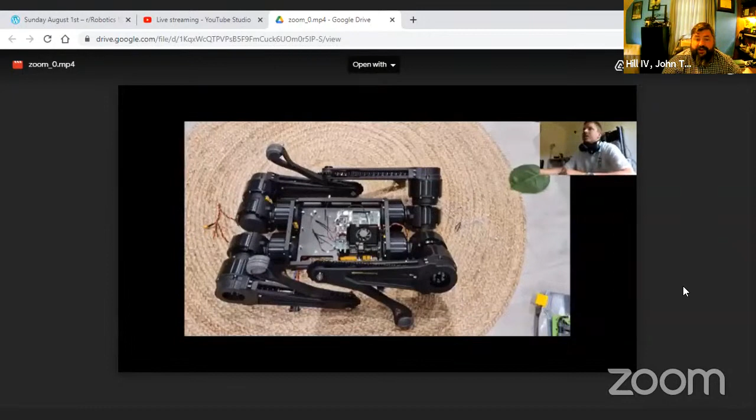Yes. I mean, just speaking for myself, I would even say go ahead with that, even if it is something that potentially has a high cost BOM associated with it, simply because other folks are going to come in and possibly find ways to make it a little cheaper. The key thing is this is all still very much prototypical work, you're not getting into design for manufacturing just yet. But even then, getting other folks to help contribute might even help move it in that direction.

Yeah, we will see. I'm open to opening it up, but not at this point. I want something that could actually work first.

Okay, so we've got time for two more questions here. The first one is, how was your experience with moteus so far? Great, nothing to complain, worked out of the box, would recommend them every day.

Can I just clarify a couple of things quickly? Was moteus the motor controllers? Yeah, MJ Bots. How do you spell that? MJ Bots, yeah. I've been compiling a long list of these controllers that we're vetting, and if that's your recommendation, then that will be added to the list for certain. You said you don't want to open source the robot as a whole, understandable. What about maybe the model of it so that people could then use it? moteus, mjbots, thank you.

What about opening the model up so that people could then use it in simulation? So then people who are considering using your robot in the future could get their hands on some parts earlier on.

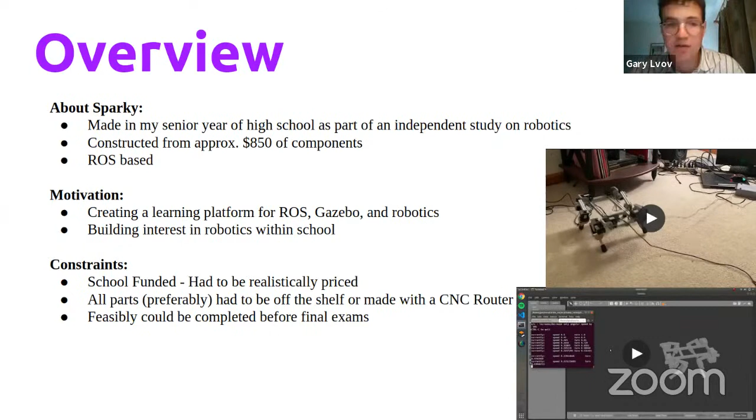And there are a few other limitations. My school's 3D printer was broken this year, so I had to come up with some creative design solutions to get around that. I ended up CNC milling some of the parts, and used mostly off-the-shelf components. So I'm going to show some highlights of what Sparky can do.

Here's an early version, kind of just turning, etc.

Here is live visualization of joint states, and this is all done through ROS. I'm going to get into how I use ROS in this project in a little bit.

Right here, we have some navigation. What's that? Not RRS, ROS. ROS, sorry.

And then here we have some more walking around with the robot.

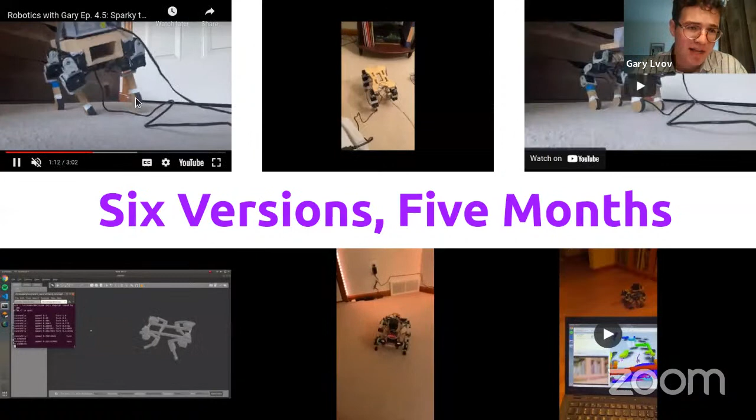Since I use ROS and Gazebo, once I got them down in the context of this project, I was able to crank out multiple versions in a very short period of time. I have some of the improvements here on the left. Top left, we have the first version—as you can see, that doesn't even walk properly. And then at the bottom, we have the final version.

On the Raspberry Pi, I was running ROS built from source, with just a few very minimal packages. On the computer, I was running the full desktop install with the gait package, which I'm going to talk about in a second.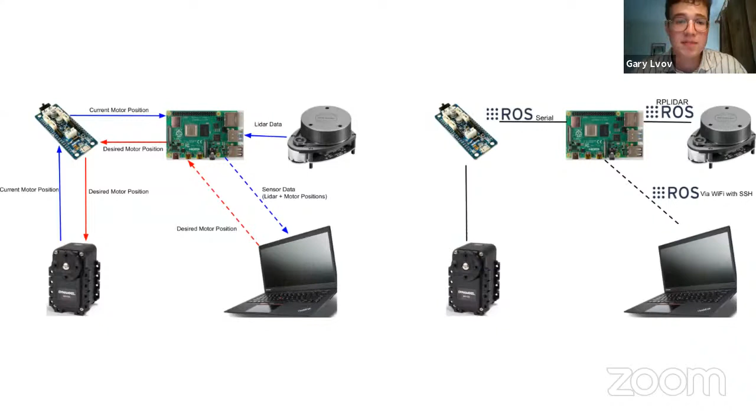The gait package is something I found that someone else did—this gait package that Juan Jimeno developed called Champ. What Champ basically does is, if you put in a URDF and input your gait parameters, Champ outputs the gait for your quadrupedal robot and your ROS navigation stack configuration. This is a very powerful tool because I personally don't have the mathematical know-how to develop my own gait, and this helped me sidestep that problem entirely.

On the right here, I have my workflow. I'd draw the quadruped in Autodesk Fusion 360—I looked at some online references, but it was really more like me drawing what I think would work. I would continue down the line, convert it to URDF from Fusion, configure the gait with the Champ package, and test it in simulation.

I'd love to say I had some sort of genius benchmark test, but what I was really doing was looking at how it walked around and judging based on that how I could amend my design. After I tweaked the simulation a lot, I'd move on to real life and do the same thing—look at the gait and try to come up with ways to amend my own design.

Outside of the flowchart, I had to select parts to purchase and configure ROS across the systems. I think the smart thing to do would have been to test the robot in simulation first and then purchase the parts, but because of the nature of the project, I just had to purchase the parts to begin with. That was something I found a little difficult—the most difficult thing about this project was selecting which parts would work without the use of a 3D printer, without being able to build things from scratch easily.

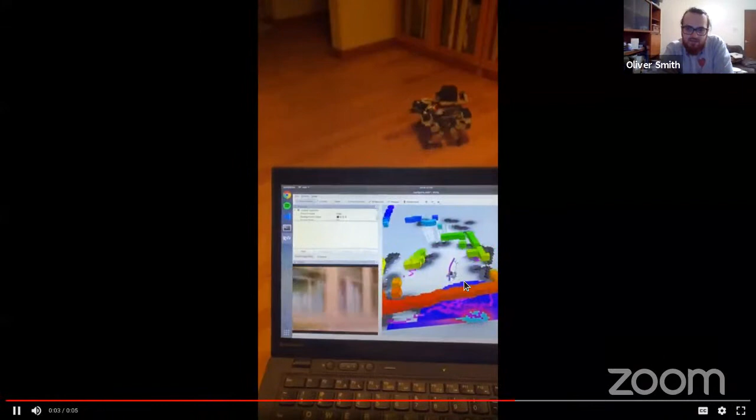So yeah, it's impressive how much work you've got into it. So it's using the LiDAR then. Yeah, you've got autonomous move. It's mapping then, and you can then set it from one location to another. Yeah, so that's using the navigation stack configuration generated by the Champ package.

Yeah, absolutely. Something that isn't perfect with this project is that the motors have a lot of slop in them, so the localization isn't perfect. Sorry, what in them? They have a lot of play. Like when the motors are fully engaged, backlash, yeah. They have a lot of backlash in them. So I found that the localization in the gait was actually pretty flawed, because in the model it's perfect.

There's no backlash, so that's why you see it drifting here a little bit. I also see the LiDAR constantly moving around, and I can't imagine that's helping. Doesn't seem to be affecting it too badly, but I can't imagine it's helping. And there's not an IMU or any attempt at inertial localization either, so you're relying on one sensor, and it's doing well considering. But LiDAR is very powerful in these small constrained environments. So I had an IMU, but I didn't have time to implement it. I played around with using scan matching from the LiDAR, but I found that since the platform wobbles a lot, the scan matching wasn't accurate either.

Yeah, you're not going to be able to do better than what they've got out of the box for that. That's also one of the weaknesses you get out of just a single line scan LiDAR, because you can't really tell where that plane is exactly hitting. Even if you stack 2 or even 3 of them on top, you'd probably be able to power through that. So you could consider buying a cheap camera gimbal off eBay, putting it on that and seeing if you can get it to stabilize. That could be a fun weekend if you have the money, time, and ambition for it. That's your own call, not mine. It's easy to have these ideas when you don't have to commit to them.

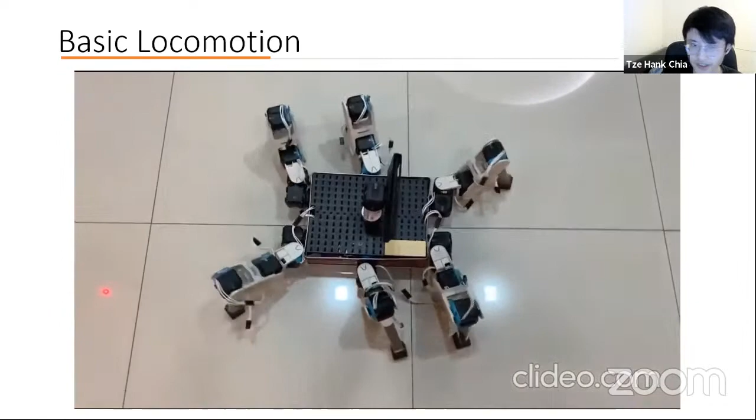As you can see, there's no special inverse kinematics at all—I basically programmed each motor one by one. It took me quite a long time, about a month, just to get it right, because back then I literally had no official training in robotics.

The way I approached this was 3 legs lifted at one point while the other 3 touch the ground, switching occasionally. I referenced this from ants—I'd slow down videos of ants moving online on YouTube and try to reference them.

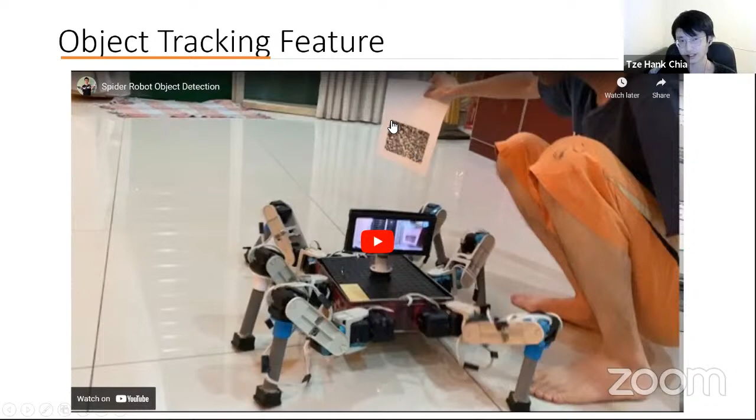Moving on to the next one, I decided to add an object tracking feature using Vuforia, which is C# programming with Unity. It's an augmented reality application where you can track an object and draw a bounding box, and that gives you the coordinate of where it is in the image.

It's not something very fancy—basically if the bounding box is too much to the left, it tells the robot to move to the left. The smartphone is connected through the ESP32 with a Wi-Fi hotspot, and it's just sending commands like turn left, turn right, based on images.

Then I was thinking, is that all? How do I push it forward? I was studying at the University of Southampton, and I noticed this paper in Nature about the MAP-Elites algorithm. Instead of training with lots of data—big data—there's this new concept called microdata, where you use as little data as possible to train a model that allows robots to adapt to damage.

I was like, wow, this sounds cool. Turns out one of the lecturers was at my university. So I thought, why not take this as my 3rd year project? I proposed the idea to my lecturer, who was happy about it, and we started working on it for my entire year.

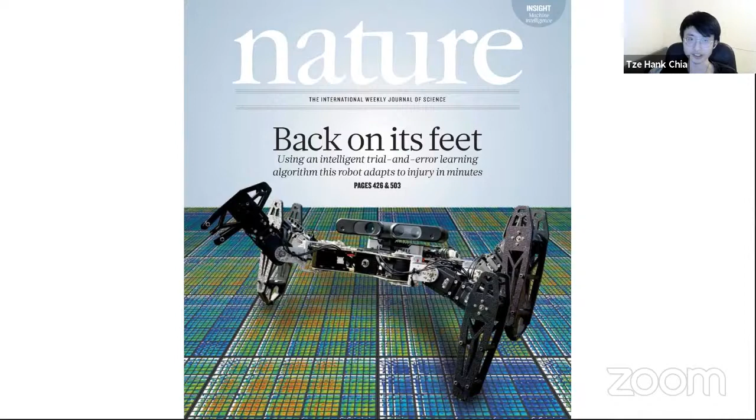So just to give you an example of the motivation. The algorithm solves the problem of pre-designed contingency plans being limited by the fallible creator. You can't foresee every incident because you are human and humans make mistakes. Reinforcement learning could be used as an alternative, but the process is slow because of simulation and processing power, and I don't have that much of a budget.

So the goal is to use a method that allows the robot to adapt to damage in the environment under a limited number of trials. If I break one leg of the robot, it has to adapt to a new method of walking in under less than 20 trials.

First, I created a model of the hexapod robot using Fusion 360. There's a 3D model of it, and I upload it to ROS, which will output a URDF file. Using this, we input it into a MAP-Elites algorithm, which is basically like your typical genetic algorithm.

Basically what it does is it populates, it tries one style, and if it's performing the best out of like 10,000 robots in the simulation, a seed of it is selected and it propagates forward, like how animals reproduce into an evolutionary theorem. So then here comes the magic part.

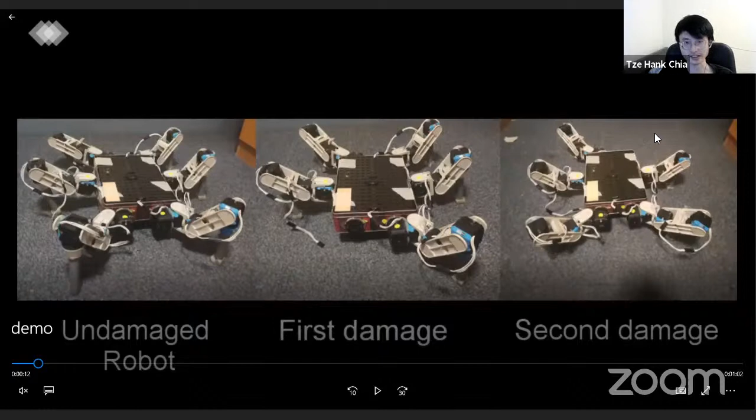So, hold on. Just move forward. So here right now, there's 30 centimeters for each tape, and you can basically see how far it moved every trial. The robot only gets how far it moved—I literally did not give any other sensor values, no torque, no current. For the base model, because it's a different environment compared to the simulation environment, I give it 10 trials to see if we can find anything special.

And the other one, I give it 20 trials because it has basically a damaged leg, so I expect it to take a longer time to adapt. You can see that every time it tries, it's always trying a different way of walking, sometimes a bit jumping around. And this one is kind of like the final way of walking.

So just replaying the best gaits—you can see it's kind of moving, sliding to the left, kind of walking like a crab.

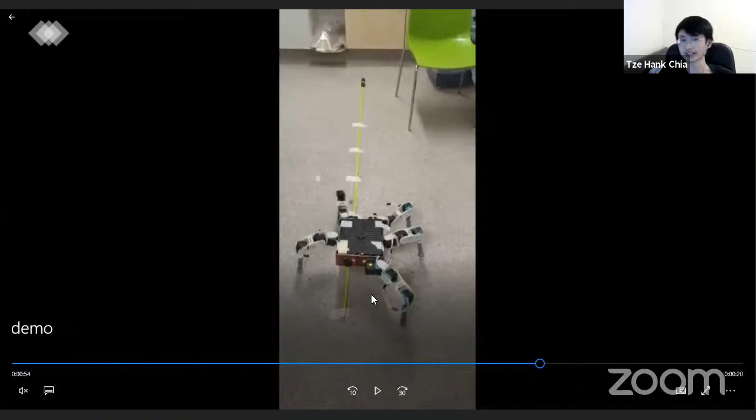And this is another experiment I conducted by removing another leg. This is like just a very typical standard style of damage condition, and this is like a crab-like movement. This is basically just random solutions I selected in my model, and this is more like a leaping movement.

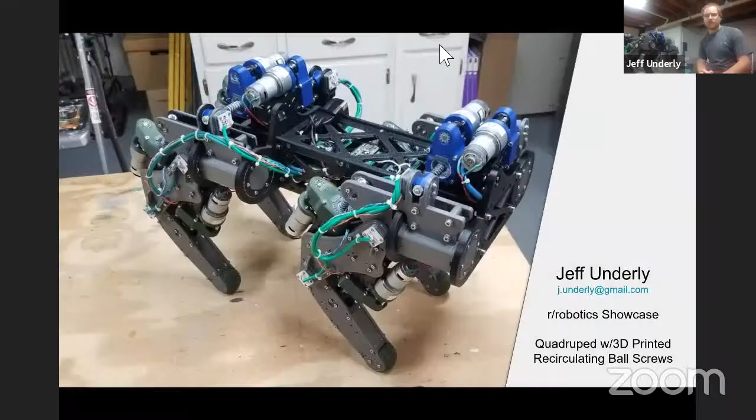It's really cool to be a part of the show, I'm really appreciative. I'm a mechanical engineer, so robotics isn't typically what I do, but this is more of my hobby and passion, getting more into software engineering. So I try to build projects that push my limits and give me a roadmap of different things I have to try to accomplish.

I built a quadruped using DC motors and ball screws, initially inspired by James Bruton's YouTube Open Dog series. He had a really cool series where he rationalized a few key concepts and really just started getting my gears turning, making this project feasible for me.

So I had a couple of goals with this. One, give myself a robotics platform to learn embedded engineering, embedded software, different microcontrollers, different subsystems, going through and testing those subsystems and getting them to interact with each other and interface properly.

Brushless DC motors are great, they're ideal in this scenario, but the controllers and drivers weren't really feasible for my budget for this project. So I decided to use DC motors and tried a few different variants. Originally I wanted to try cycloidal gearboxes and different approaches with high RPM DC motors with high reduction, and I just wasn't finding a happy medium there, buying cheap motors with no documentation, testing them and trying to find a sweet spot.

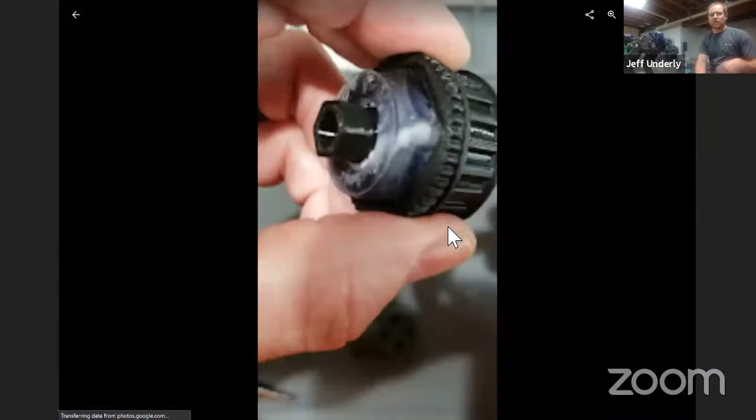Ultimately needing to print 12 actuators, I decided to use my SLA printer for the ball nut, and it was printed in this transparent material. It really gives a great visualization of what's happening here. Hopefully this video loads and isn't too choppy for you guys. You can actually see the bearing balls rotating around in that helix and being fed from start to finish.

Give it a couple more seconds before we give up. There we go. So there, I'm just holding the ball nut stationary and rotating the screw. In application, the screw itself is held stationary and not allowed to rotate while the ball nut rotates around it. So a pretty good example of that action.

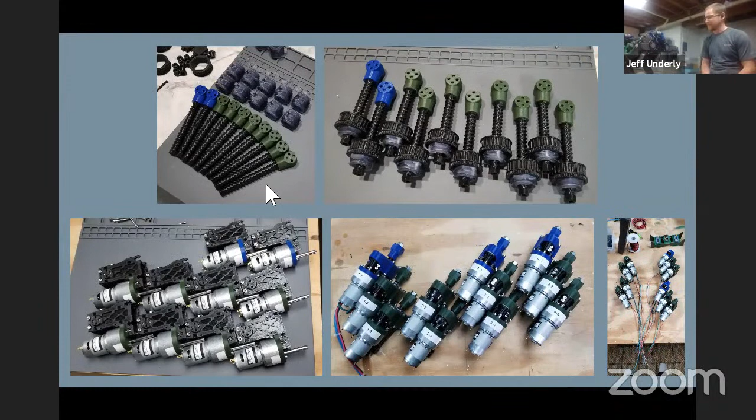So I had 12 of those. I got printing and assembling. There's a lot of hours in that, and a lot of questioning my choices on printing these bearings and assembling the 1/8 inch balls by hand. There's about 1,100 1/8 inch ball bearings in this assembly, so that was time consuming to build.

Knowing that 3D prints have pretty good strength in X and Y, but poor Z layer adhesion, I do have a threaded rod that passes through the ball screw itself. There's really minimal hardware used within these ball screws, but that allows us to have the tensile strength required for different positions and forces. And they actually turned out to be very robust and quite strong.

I was able to test the gear motor's torque with a rudimentary setup with a scale, but I just don't have the equipment to test the actual strength of these actuators. I can't stop them by hand, so I was pretty happy with those performances. They do each have a min and max limit within the assembly. I do have all the CAD open online, so people can open up the Autodesk Share or open up a step file.

My original thought had a mechanical encoder geared to the ball nut, but ultimately that didn't really work. I was getting too much bounce and I couldn't filter it with hardware or software. So I gave up on that and went to magnetic position sensors. It offered me another subsystem to test and integrate, so I was pretty excited about that.

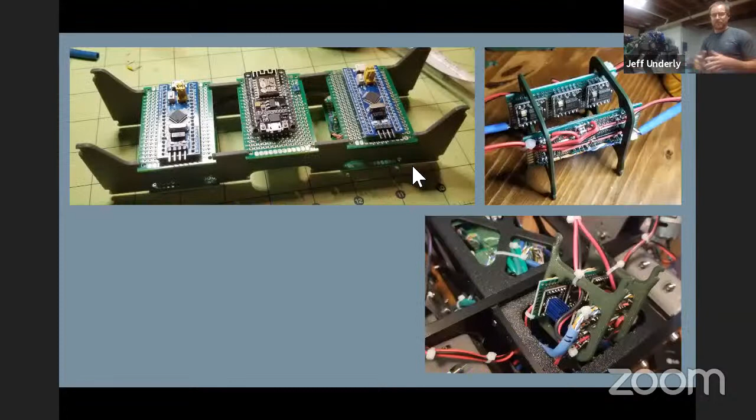The control side, that was the learning experience, what I really wanted to push myself in. It's a bit of a complex network, using an ESP8266 as the central Wi-Fi enabled main processor. They're talking to a couple of STM32s, which handle the front and rear IO respectively, going down to their DC motor drivers. It's a TB6612FNG DC driver, and I'm using both channels of those to accommodate the current requirements for these motors.

But everything has been working out really well. Everything fits excessively snug into the frame. There were definitely some long hours soldering everything, and I questioned some life choices there, but eventually got everything together, troubleshot the wiring, and this turned out pretty solid.

Like I mentioned, I'm using the AS5600 magnetic angle position sensor, which lets me directly monitor those joint positions. Originally I was using encoders, with the mindset of polling the encoder on startup, but because it was an incremental encoder, not an absolute one, it would lose position and wouldn't know where it was.

So I was really excited about that change. It added a little bit of work, but offered another subsystem to test.